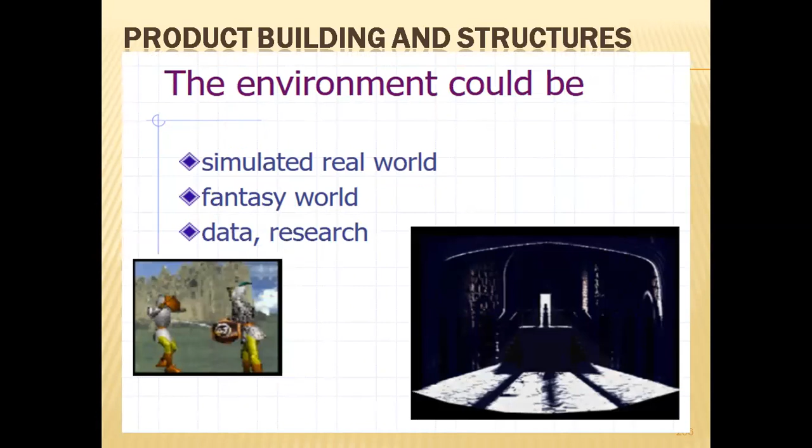This is the simulated world which we create. We create something which is there in our imagination or creation. Earlier we were having 2 dimensions, so virtual reality basically did 3D. It is more or less that you are directly interacting with something which exists right in front of you.

Imagination, for which I explained the example of 3D walkthrough software, where even if you have not constructed the house, the architect or civil engineer will create the house in front of you, giving such a feeling that you are seeing the real house in front of you.

So it is not only related to vision, your senses should feel it, you should be able to manipulate, you should interact, be responsive and empathetic. You are emotionally involved in it, so you have the feeling of how the house looks.

If you create a model, you will just get a look at how your house looks. But here in virtual reality, what we try to implement is that your senses will feel as if you are actually entering the house. The door opens, you enter the house, this is a veranda, and so on. So these are the things we have discussed.

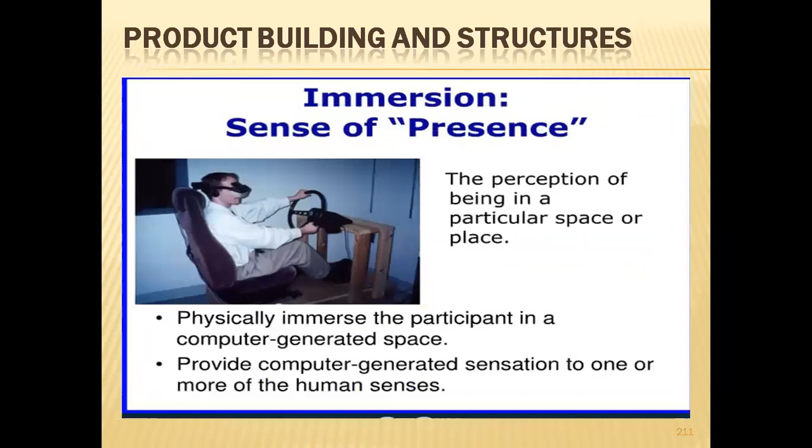Once again, to recall, these are the 4 important elements we have discussed: sensory feedback, interactivity, immersion, and 3D virtual. These are the examples we have discussed, and these are all the technologies used for display.

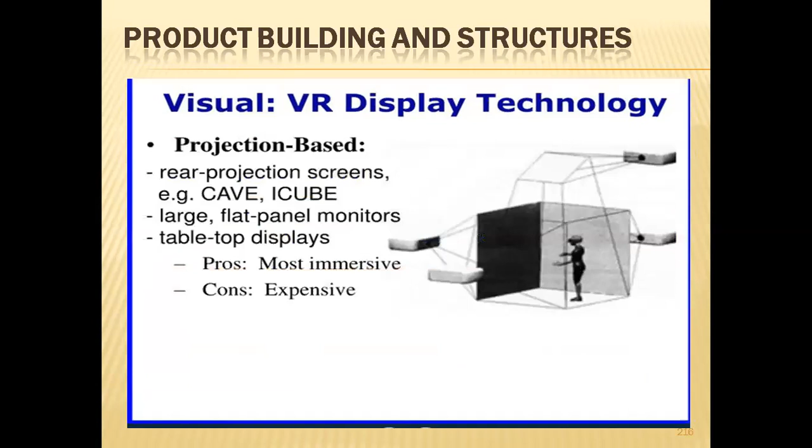Various advanced technologies have come: head mounted displays, head tracked displays. Head mounted is directly connected to your eyes, you can see it like your spectacles, you can wear them and enjoy them. Even now, a lot of games have come and people are enjoying those games. This is the various projection technology based VR, virtual sphere.

This is the last element, interactive, meaning it gives you a feeling that you are interacting with something which is not really physically existing. It is existing in your imagination, created as a model in front of you.

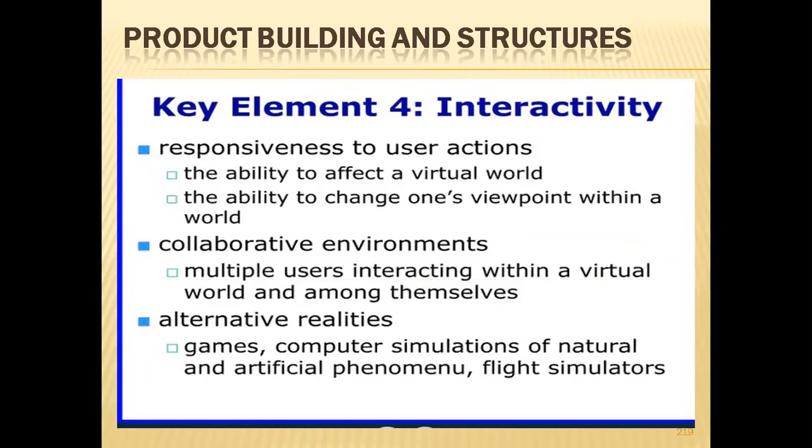Entertainment, as you know, is a big market where games are created in such a way that you feel you yourself are playing through the screen. These are all the applications.

So far we have studied virtual reality; now our application is how virtual reality is used for product development. Whenever a company wants to develop a product, if you directly go to manufacture the product in real life, you need tools, jigs, fixture designing, and a lot of effort is done.

In this process it takes more time, more investment. Afterwards you feel that something goes wrong, so before launching that product in the market, you have to go for testing. So all these various phases of product development will take time.

Now, how is this greatly influenced by the development of virtual reality? By utilizing virtual reality to develop a product, it is called virtual product development.

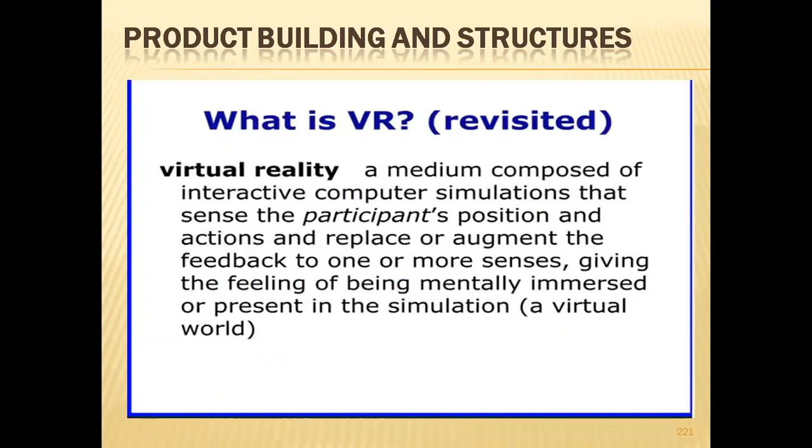Okay, this slide is very important. You have in mind that we design some model on the screen, test it, go for FEM analysis and all - that's not the end of it. It is one part. Virtual product development will basically touch all the aspects of product development.

It will help you to understand the market. It will help you to design the product, detailed design, and virtual manufacturing.

There's a new word you should know: before actually going to manufacture, virtually you are trying to see how the product can be manufactured. Then there is virtual process planning that will help you develop all the various aspects of process planning.

It is virtually done for marketing too. You can release some virtual images to the audience, to the customers, where before existing production, some selected premium customers, you can show them the product and get their feedback.

So remove from your mind that virtual reality means only designing the product. Virtual reality will help you in all aspects of product development: virtual designing, virtual process planning, virtual manufacturing, and even to some extent sales and marketing.

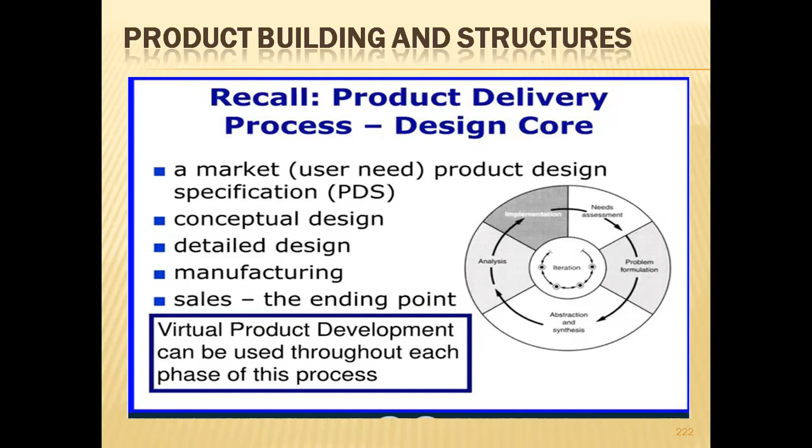So VPD, what are the advantages? Lot of advantages are there; different slides will explain to you. But basically, reducing time, saving the cost, understanding the product in a better way - it integrates three things: technology, process, and people. That is the main concept of VPD.

As I said, remove from your mind that virtual reality is used only in designing the product. It is used in design, it is used in manufacturing, it is used in marketing. Is it clear? You should not think that we only develop some model and test it - it is used for both.

Design is one part, basic important part. Also virtual manufacturing is there. Then also marketing - as a customer, you can launch the product in a virtual form and release it to your premium customers, where they will really feel how the product looks like.

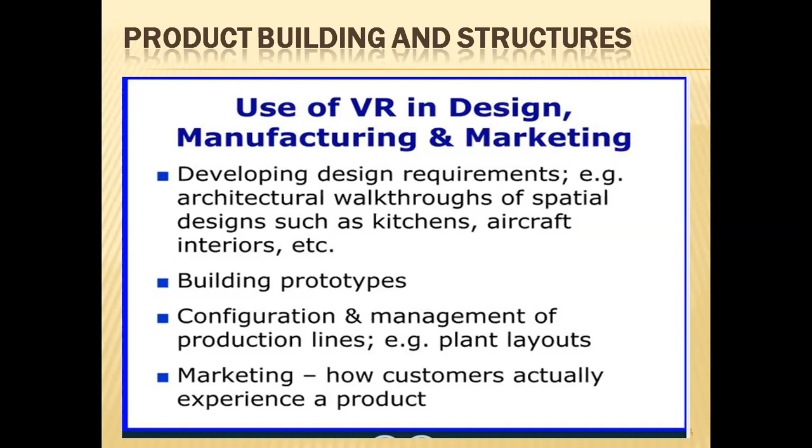Suppose you are launching a new television. Before launching it, you can show the image to some selected customers and then take the feedback. So all this is done before manufacturing. This is how things are really done.

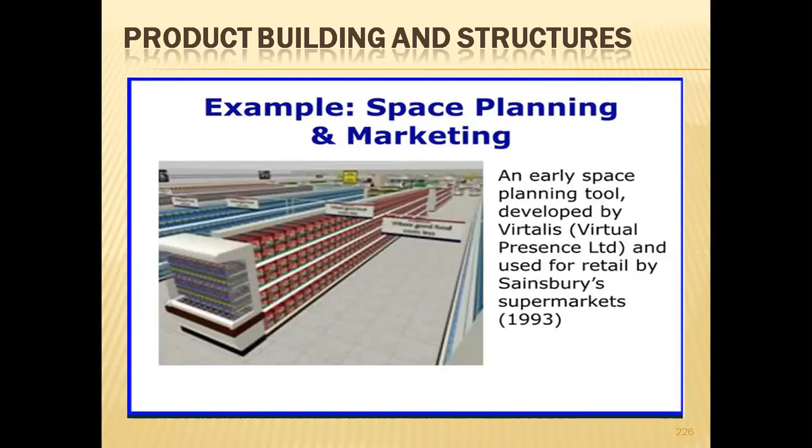Now coming back to the basic definition, virtual reality is used in design, manufacturing, and marketing. Where is it used in design? This is our core study, virtual product design. I think you have studied in CAD CAM all about computer aided design - that is just an example where virtual product design is used.

Then this is only designing. Once you design, you have to test it - that is product simulation. You simulate the model, put it to some test, and then you can later do product staging. So what is this product staging?

You can design some retail space planning using virtual reality. Consumer research you can do - already I explained to you - and you can predict the behavior analysis.

Virtual reality is also used in virtual process planning: assembly, visualization, the entire plant. Here civil is also very important. Before you design the plant - your assembly plant, manufacturing plant, retail marketing plant, whatever it is - that entire plant will be there in front of you.

So what is the use of seeing the product, imagining, realizing, sensing? If you want to make any changes at any point of time, you can make it without investment or without any input.

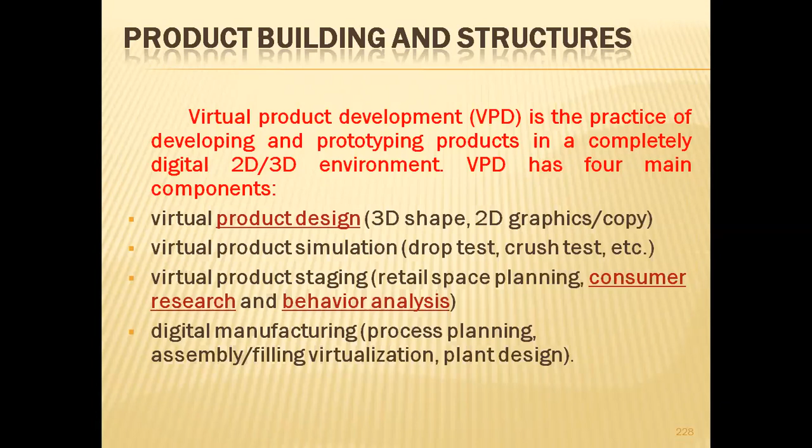These are off the floor, not on the floor. Before going to the shop floor, you do all these things. So now, what is important, what is a VPD?

It's a collaborative work. It's a web-based environment where you are creating a real-time product as if it exists. So now, what are the advantages?

It will help practitioners arrive at the right idea more quickly, to predict things better. Launching the product without taking customer feedback and waiting for it to fail is disastrous. So you reduce the time.

Market failure is reduced because you are already developing some prototype models. Visually, you are taking customer feedback, which probably will help you make some changes, and all the product development costs are reduced. These are all the points which will help you understand the importance of virtual product design.

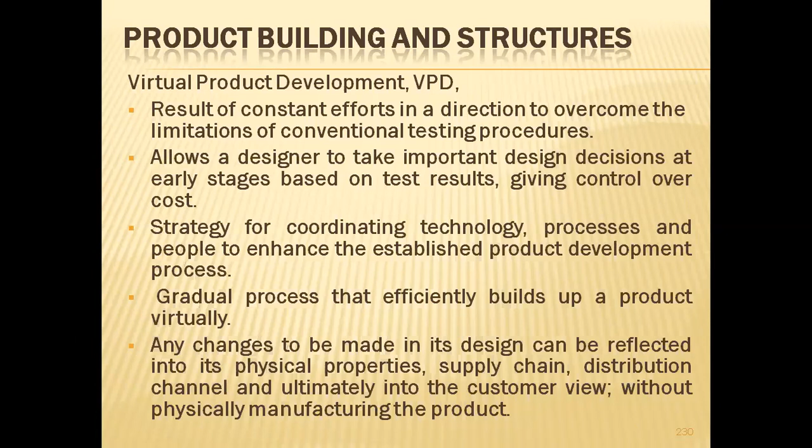So now to carry out this VPD, as you know, it is used in design, manufacturing, and marketing. Different softwares are used, which we will again discuss in the next slides.

This is one more thing I want to briefly tell you. Virtual product development means virtual manufacturing, virtual marketing, virtual design, and virtual process planning. So what is virtual process planning? It's a new concept, part of manufacturing only. It's a new concept for manufacturing companies, which is very successfully used by a lot of companies.

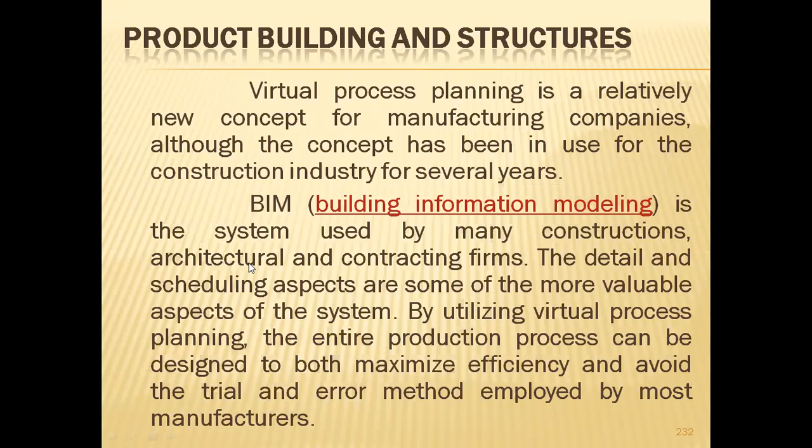So it is about designing of your plant, how the process is planned. The entire production process before actually going for production can be designed and virtually seen. Any changes in your plant layout, movement of men, movement of materials, location of machinery, how the product is planned, unnecessary time can be calculated, and wherever possible you can try to reduce the time and increase efficiency by using this method. So this is one of the most important advantages of virtual reality adopted in virtual process planning.

Now basically we need to concentrate on virtual manufacturing. What is virtual manufacturing? Virtual design is the CAD part, virtual manufacturing is CAM, computer machining. So it is not only about machining but all the product and process design. You are using machine tool, robot, computer integrated manufacturing. All these domains will be helpful in understanding this. Even these are all very wide topics.

Even you can use virtual manufacturing to see how it improves the quality, what is the effect, how quality is improved by using virtual manufacturing. All these things we can study. These are some of the examples.

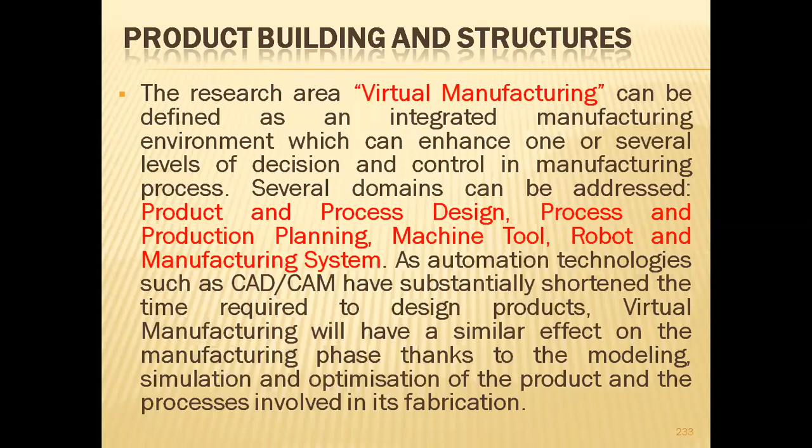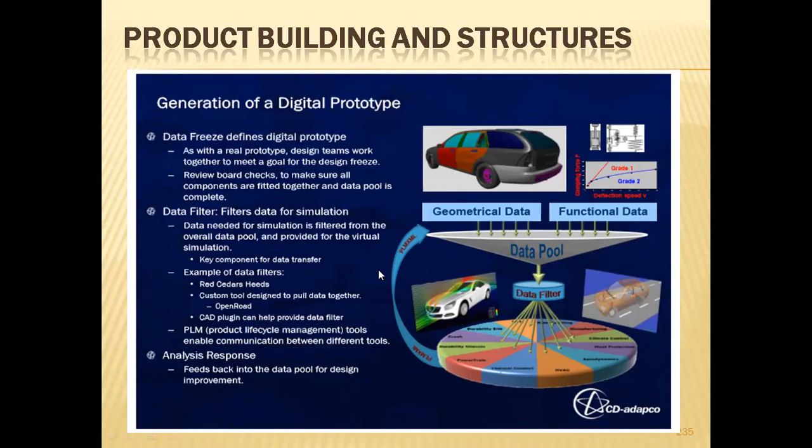If you want to see virtual manufacturing, these are all the parts where we actually take the help of virtual reality. We have hundreds of slides where we can understand. Before actually creating, using the functional data and geometric data, we can create models, then put them to testing, then whatever data is required for simulation is done, and feedbacks are taken from various points so that we can improve the design.

These are simulation systems. Simulating system means before producing the product, you create a model and try to simulate it so that if you want to make any changes, we can make the changes.

This is a simple example we have taken of the vehicle. Different systems are there in a vehicle and how they are related. Some are interdisciplinary because they involve mechanical, electronics, and artificial intelligence or latest technology, like building your computational fluid dynamics, then complex interaction, all these things.

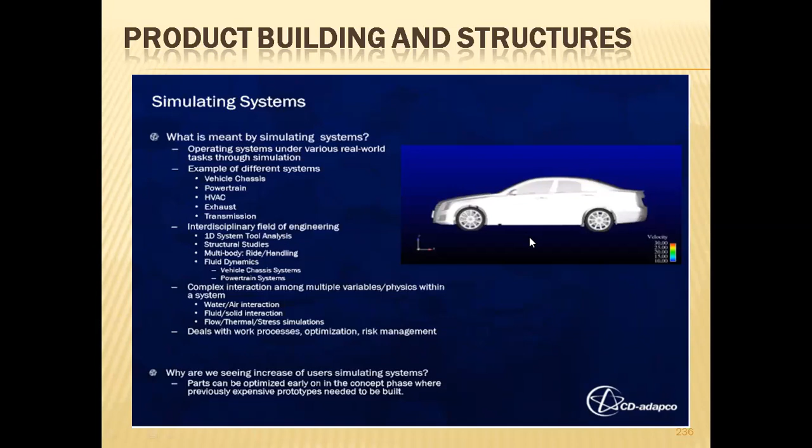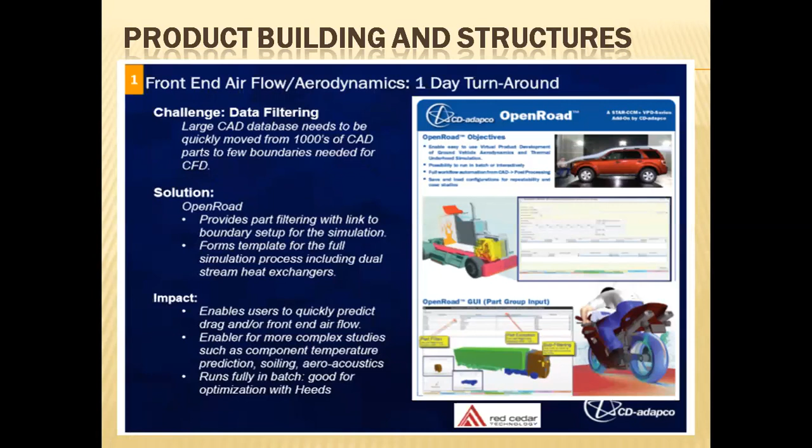Once you adopt the solution, what are the changes, if you have some problem, how we need to fix the model, how you can filter the various suggestions - all these we can do with the help of virtual methods. This is one more example we have given.

This is a very simple example of different slides showing how virtual product development is very important. It reduces the time, saves money, improves on cost.

One specific example is that there are certain non-linear conditions, technically speaking, that are not practically possible to test even in your regular testing. At that time, you can go for VPD, virtual product development, so that complex challenges and problems can be answered. Your vehicle crash test and a lot of other tests, simulation tests before manufacturing the product, you can go for.

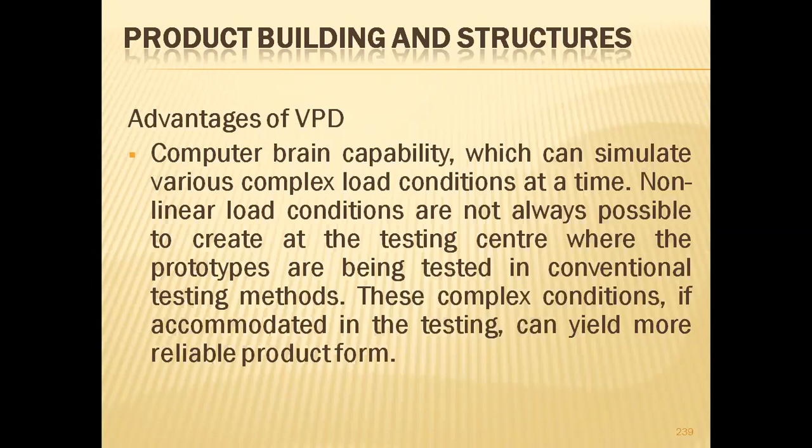So every phase, every single activity of product development is influenced by virtual reality, virtual method, virtual product development, virtual design, virtual manufacturing, and virtual process planning.

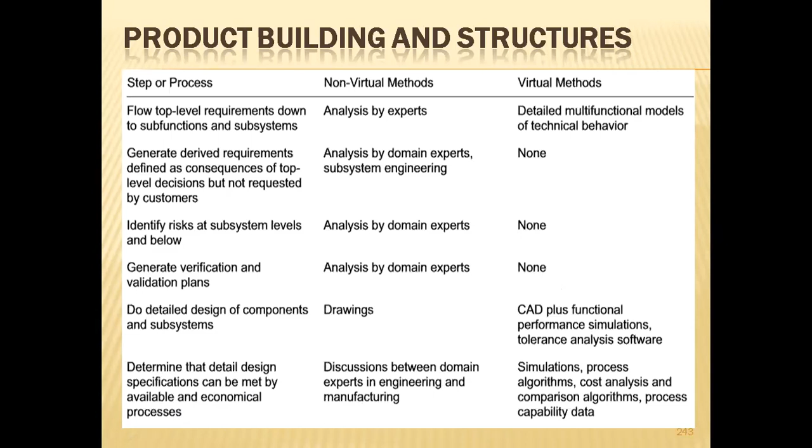Now what is the next operation? Determine that detailed design specification can be met by available and economic process. Earlier this was done by discussion with subject experts in the field of engineering and manufacturing. Now that has been replaced by simulations, process algorithm, cost analysis, and comparison algorithms using process capability data.

So this is a brief idea about virtual product development, and you should think that virtual reality is not applied only in design, most popularly you feel that it is involved only in design. So in product development, it influences three things: virtual design, virtual manufacturing, and virtual process planning. In almost all the fields of product development, virtual reality has some role to play, for which these four slides will help you to understand.